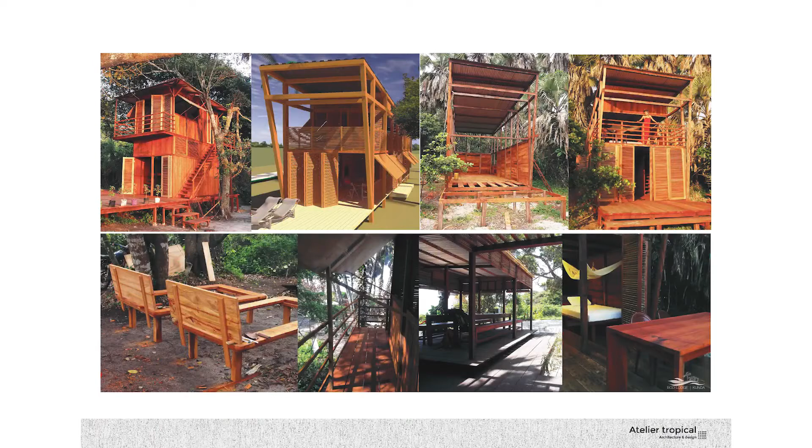So that's the view, that's another view. So those are the little cabins. So this is the 3D, and then after we made it, this is another one. We did all the furniture on the site. So everything is open actually. It's all about shades and wood, and the wood is treated.

And actually it's working. People were afraid to go there for holidays, but now they do. They're like, oh, is there AC for the mosquitoes? How do you do it? No, you do it like back in the days, you have the ventilation, and it's never hot in there. It's never hot.

And yes, it's all about the views, the landscape, the undulation, and the trees. And you don't cut trees. When you don't cut trees, you don't need AC, somehow. So after that, I had another beach cabin, but this one is quite simple. It's almost the same concept. So pilotis, rational, regular frame, balconies, panoramic view, the big roof so you protect the wood, and all the natural ventilation, the redwood, and the inside-outside fluidity.

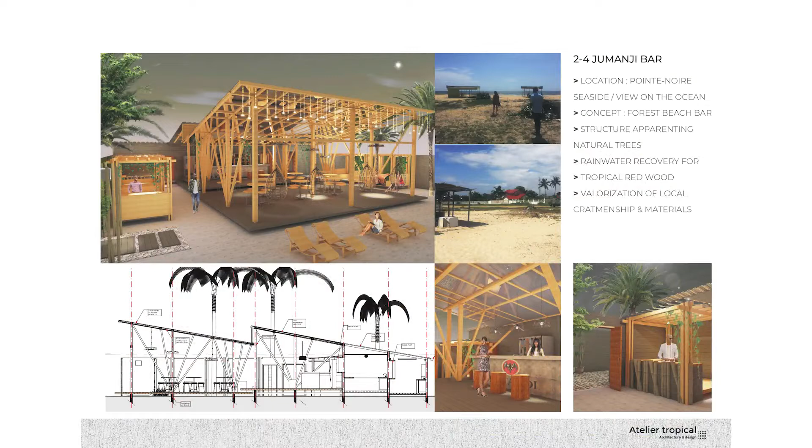And that's another one that's coming, so I just wanted to show that it's possible to have different kinds of structure. You can actually play with this material if you want to. It's also an outdoor bar. It's quite pleasant to work with this kind of material. So I started with that because it's the simplest project that I did, but I think it's quite fun, and it's also part of architecture.

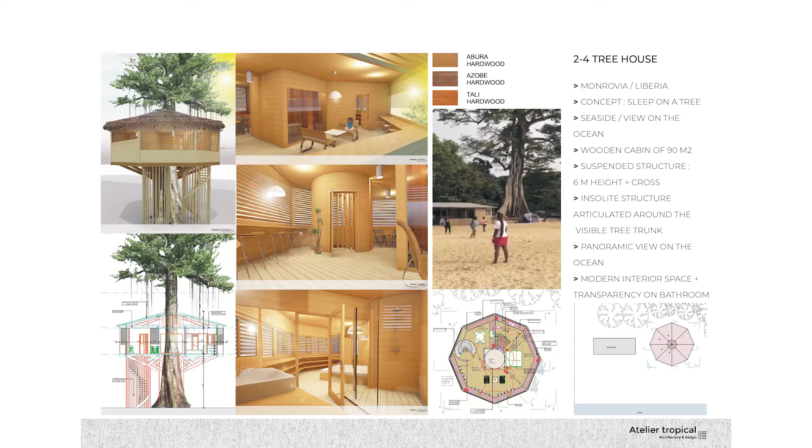That's another one that's coming, in Monrovia, Liberia, so it's a tree house. Sometimes you can have very eccentric clients who want to live in unusual places. So this tree house is based on a kapok tree, and you have the sea view on this side, and you have the trees and the forest. He wanted a place with a panoramic view, but where he's hidden, you can't see what he's doing inside, and then a modern bathroom here with glass, so it's just for one person or maybe a couple, but it's possible to do. This one is going to start not far from now.

And then I did some research about the wood because it's a bit different, and you can play with that. And then I will come to the water and the void, which is another concept that I use a lot, because we always talk about structure and buildings, but you have to play with the void, because a building doesn't exist if there is no understanding of the void, of the landscape, of what is happening outside. So it's actually an exchange, a dialogue between the void and the building. And water, because the project I will show you plays with the water too.

So we start with a theoretical project. This one was made in Cambodia, actually 8 years ago. But it's a project I think is really simple also. It's parametric, it's a big roof. In Cambodia they have temples surrounded by a moat of water, and we had to put a facility there. A lot of people thought that you should build here, but I think you can leave the void and build around the void, and then play with the landscape and the distribution.

And so that was a building that unfolds around the landscape, an internal landscape. So how do you bring the landscape inside the building? That's something you could think about in your future projects, maybe. And then this is the first patio beach I did, which is not finished yet, but it's not far from the city, and the concept is a patio.

So there is the beach, and the client wanted rooms and bungalows that are independent, but he wanted people to be together if they want to, so they can go to their room if they don't want to, and they can meet if they want in the living room, which is an outside living room because it's just a big table, and it's more about the outside.

But then all the rooms have to have the sea view, so you have to play with that in a certain way. And so this is what happened. And so the patio has an internal garden. And it's also about the void. So when I imagined this place, I had to think about how to get to it. You can actually explode the bungalows, but if you want to keep them together, you have to think about something else.

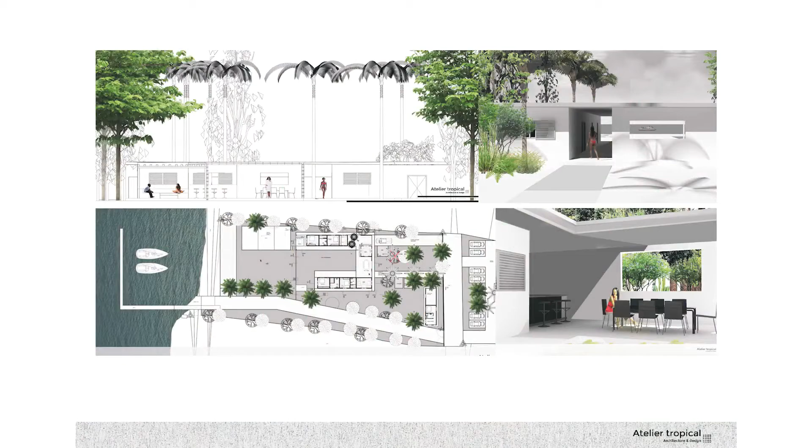So that was the project in the beginning. It changed a little bit after. So first you arrive by there, and there was just a hole. It's not a window. It's just a way to see the seaside without actually... It's like, how can I say that in English? Mise en scène, maybe, no. So yeah, it's more like cinema. Like you arrive, you see the building, but you see the seaside too, right?

Okay, yeah. And then you have all the bungalows that are inside, I think there were like 5 or 6 rooms, and then you have the common space, and then you have the kitchen. And it changed a little bit because I put something up, and I couldn't find the plan for the presentation. And then you have the place to put all the boats and stuff. It's not finished because there was a lack of money at a certain point, and now I think it's getting better. So they call me. So we're going to finish this project.

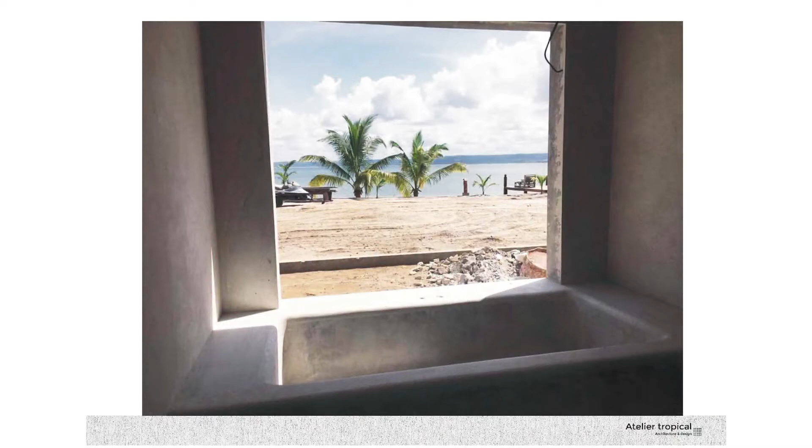So for now it's very simple. You can see the frame, and you can see the room that actually has the sea view. This is one of the bathrooms that has a sea view also directly. So the concept here is that you can actually have the bath and have the view on the seaside. And the materials are supposed to be... they don't go there often, so they don't want to have to spend money to manage it. So it's just proper concrete. You treat it a certain way, then you polish it, and that's it. And wood and concrete and white walls.

So that's also the place. So this is the kitchen that you can open with a bar, and then there's a place where all the family can stand, and they have the sea view. So they're just outside. And yeah, some details. So very simple. There is no fanciness here. It's really raw.

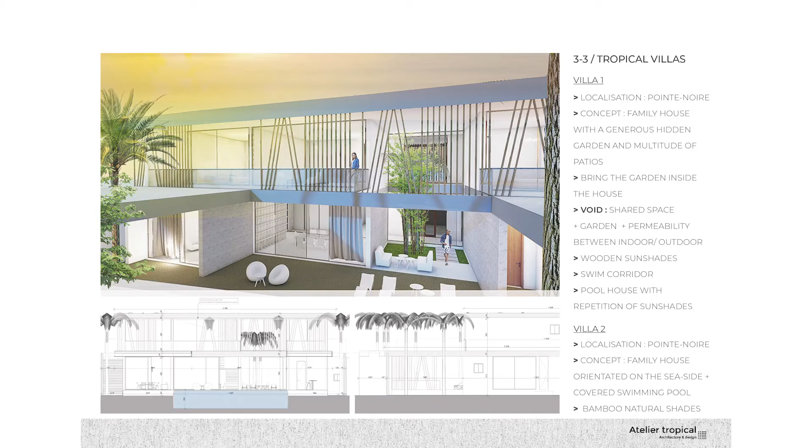So I go to another project that talks about the void. This is another project that is actually now in structure studies. I call all the villas tropical villas because I try to think about how you actually interact with the climate. And this project is mostly about patios again, and different views and shades. And those shades will be in wood, so I will also try to work with local craftsmen. And the concept was to bring the garden inside the house, so all the family can stay in the living room, but they can be outside. And if they are inside, they also have the view on the garden in different ways.

And so the water here is not real water, you bring a false one, so it's just a swim corridor. And it's a repetition of sunshades because this side is the seaside, even though they're quite far from the coast. But you actually have the sunset, and the shades are here for that. And the second villa with the void. No, this is another 3D. So that's what it's supposed to look like when it's done, because I didn't want to put the unbuilt projects, but Chuka told me I should also show the ones that are not finished yet, so that's why I'm showing you that.

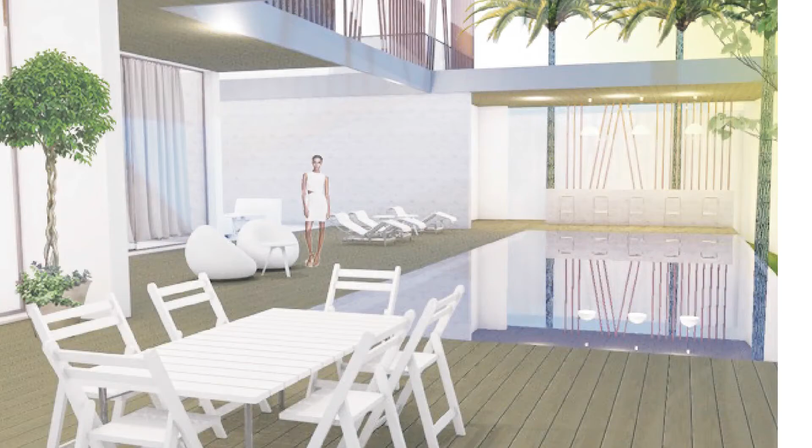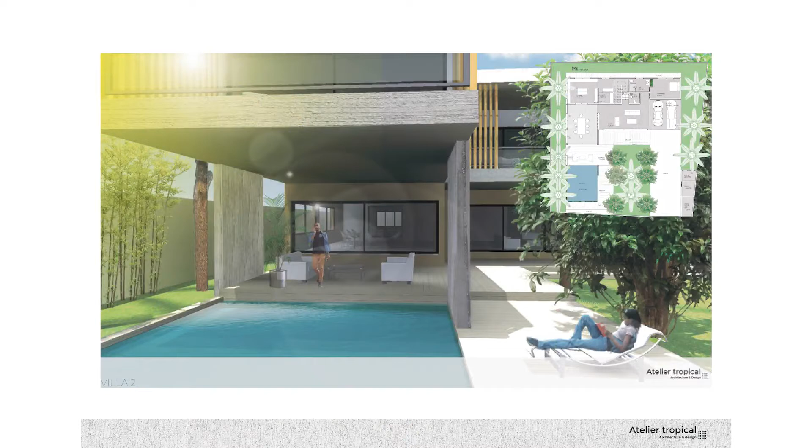And that's another, so there is a pool house there, and it's all about volumes, void inside the house. That's another one, and it's almost the same concept, but not the same configuration. So the void here is under the second floor, and my client here likes to swim, but she doesn't like the sun, so she wanted to swim but be covered. So I managed to do what she wanted, and here the garden separates the parking from the family side, so it's quite different, and there is a covered parking too. So landscape is very important.

And then I'm working on this project, which is an urban project. So that's actually not the center, but a part of the center of the city I live in. And there are actually anarchic bars, but it's a place that every day is used; maybe it's the only public space in the city, because like every African city, it's a private city. We don't have gardens, we don't have, so the city is thinking about changing.

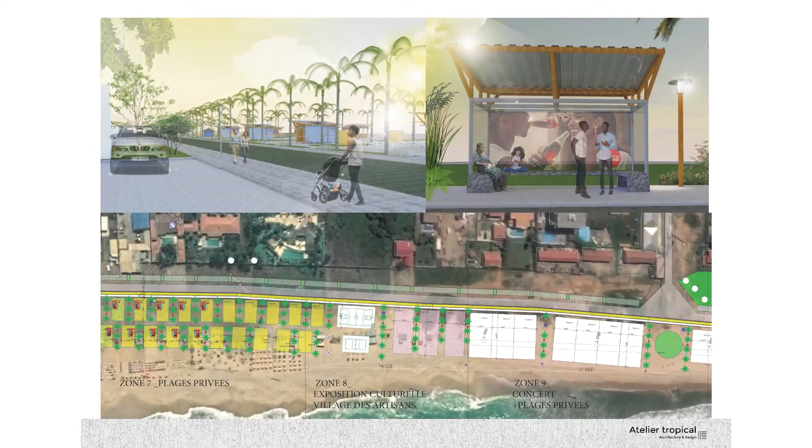And yes, they asked also because the bus is going here. For now the national transportation company has some problems, but they still have some buses right now. They're not working quite well, but still they want to have some bus stations that are not expensive and suitable for the seaside, so no fancy things, just raw local material, not expensive, and with solar panels, so they can be lit by that. And so this one, I think, is the one they like the most, so I think this one is mostly the one they would do.

So we have wood, concrete, and stone, and solar panels on the roof. And they also asked for little kiosks, to organize the beach, because it's already there, but there is no structure, so everybody just goes there and throws their things. So they wanted to have an identity, something that everybody can customize, but it's made with local material, and you can close it and put everything you want inside, and it's on pilotis, so it's quite simple to do.

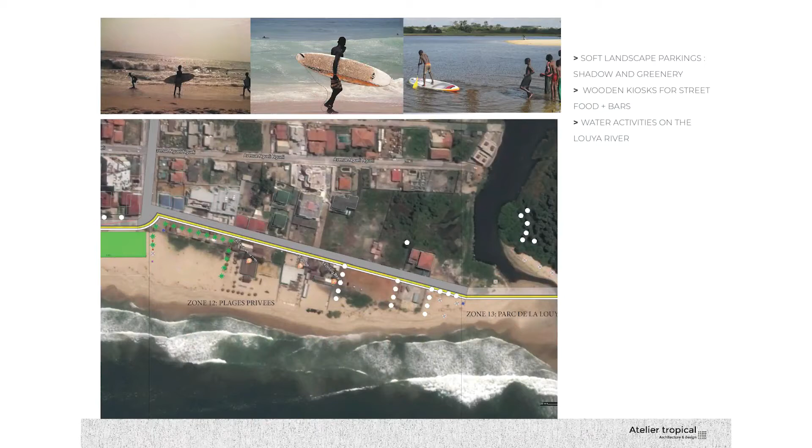And we call it ganda in Congo, it's very popular. So that's another view. And the last part is this part, which is the laguna. I don't have any views for that, but the idea is to put some water activities on the river, and that's the view of the city. That's the way they rest during the weekend.

It's nice. And because we have a need for parking, I propose what I call landscaping parking. So you don't have to put a lot of concrete to do that. The separation is vegetal. You put some trees so that the cars are not in the heat, and you conceal the cars so you don't see them. It's not like a big parking on the beach side. You just put some trees, and then you have the parking, and somehow it disappears, because nobody wants to see linear cars.

So the last theme is the sky, the shade and the permeability, which I think is another concept that is very important when you work. So this project is actually a penthouse, and my clients had actually finished the building when they called me, and there was a problem, let me show you. Because the firm that did the construction didn't manage the two last levels. So when you were on the 8th level and the 9th, you could see each other. There was visibility, so it was not well thought out.

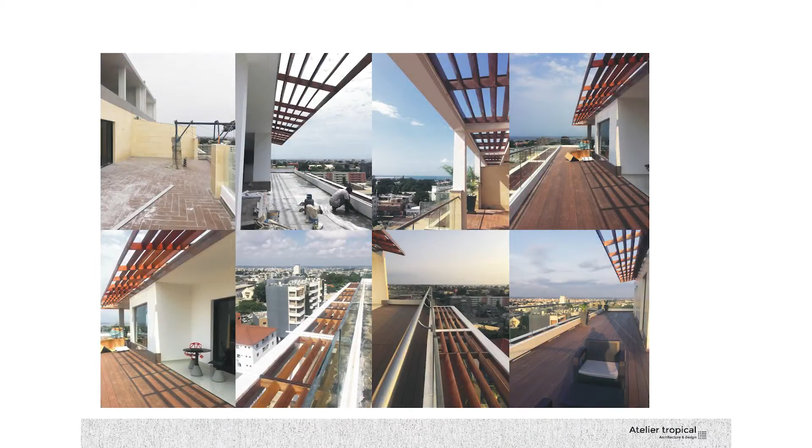So that's the project here. We added all these things, and after I did all the interior, the home staging, everything. So everything changed from this to this, and I will show you some pictures. Yeah, so that was how it was before. And then, no, that's the other side. So this view, this place I think is this one.

Yeah. So they have a lot of terrace, and we put some decking. We kept the permeability with the transparent railing, and there is this big pergola, so you can actually enjoy your rooftop, and there is something much more poetic about that than what it was before.

So that's the inside. It used to be like that, and then I made some separation with the living room. I put an exterior bar so you can have the view on the city. So this is outside, but inside there is no real separation. It's just because sometimes the rain can come inside, so we put some glassing, and actually it worked. And that's the inside.

So a lot is imported because they liked Italian furniture. I didn't manage to do some locally made furniture here, but you know, I tried to keep the tropical African touch somehow, and I think they're pretty happy about that. And that's a portrait.

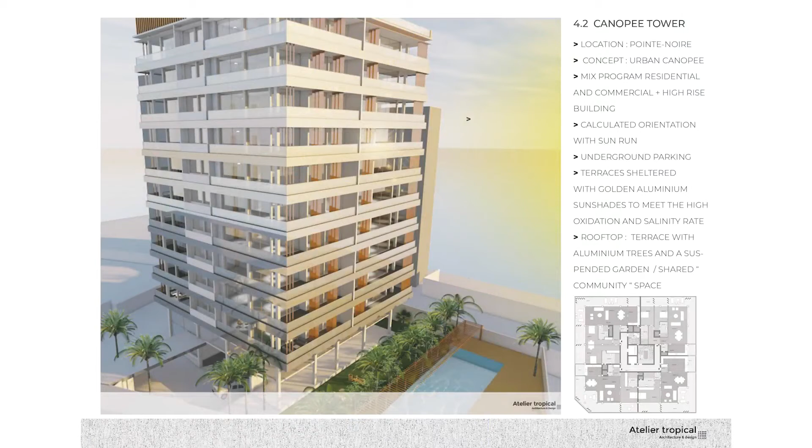And I will finish with this project. So the thematic was the sky and the shades. So that's my first tower. We'll see how it goes because now the economy is not doing well, and my client said, oh, maybe we'll do like maybe 2 floors. But he paid me for that already, right? That's cool. But I mean, to actually do the construction. So we are an oil country, so now it's really, really bad. So a lot of projects are quite shut down.

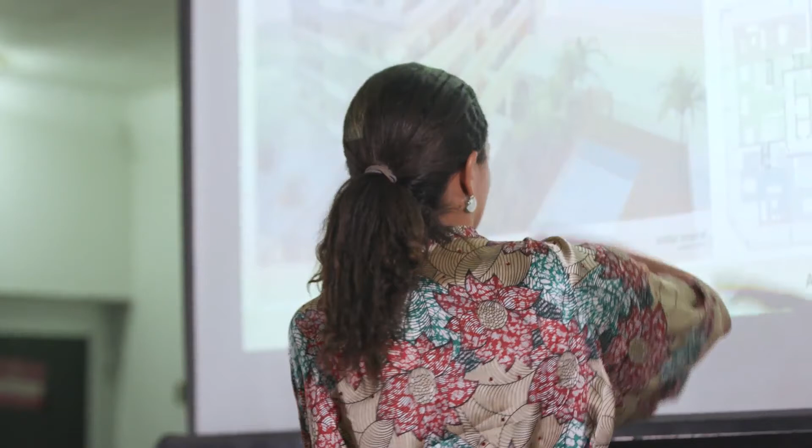But he wanted a tower. That's what he wanted. So he had a site, and then I proposed. So it's very simple. The concept is simple. The floor is liberated. The parking is underground, and the apartments all have terraces, so they all have a view. They all have what we call transversality. And we have a nodal distribution.

And what was important is that I actually calculated the sunrise, where the sun goes. So how do you actually orientate your building. So that's the first, and it's a mixed program. So on the first floor there are supposed to be some shops. We'll see.

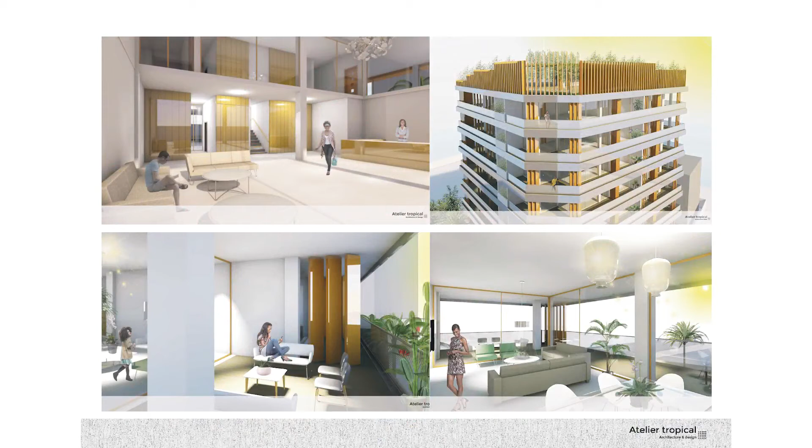And so the rooftop is a common place. It's open for all the apartments, and the concept is also the canopy, so it's supposed to be a green garden upstairs. And the shades are made by this. This is supposed to be aluminium. It's not wood for this place because it's another kind of project. But I think the concept is still here, and all the living rooms have this kind of situation.

So you have these terraces, and you're supposed to have a view, not to be in a constrained place. Okay, I don't know if it's English. And that's the lobby. And there is a sport place. It's a simple project, but you can actually read the structure, but it doesn't mean that your building should stop there. You can actually calculate your cantilever, and you can play with that too.

So the materiality here will be aluminium, because aluminium works well when you're on the seaside. You really have to think about the level of oxidation to properly find your aluminium, because I had a bad experience, and now I know. And that's it. I think when the money is there, it should be nice. So just waiting for that. So I think I'm done.